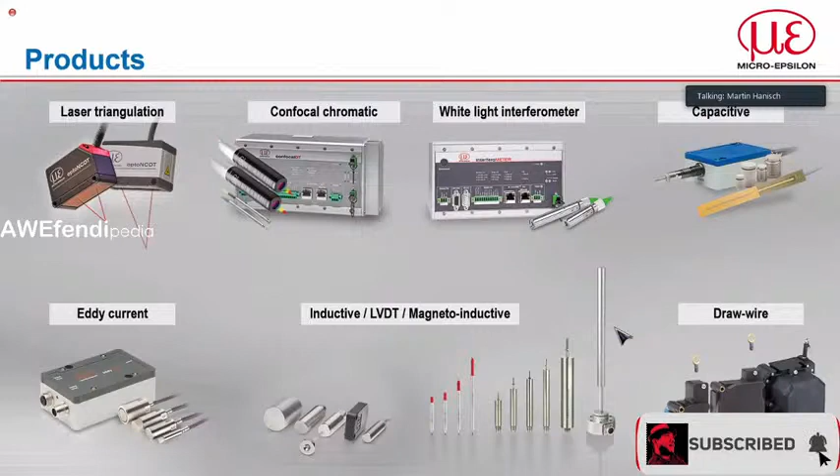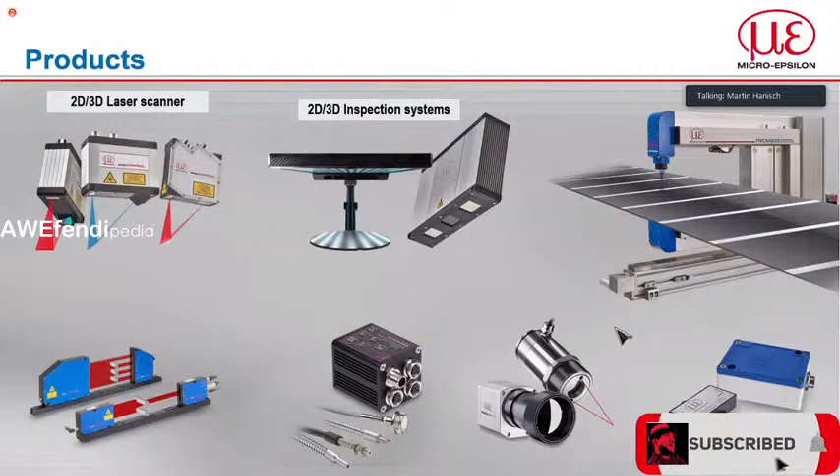Confocal chromatic sensor systems, white light interferometers, capacitive sensors, eddy current sensors, inductive LVDT, magnetoinductive sensors, draw wire sensors, and also the area we will talk about today: 2D, 3D laser profile sensors, 2D, 3D inspection systems, measuring systems, optical micrometers, color sensors, temperature sensors. Today we will only talk about this area, the 2D, 3D laser profile sensors.

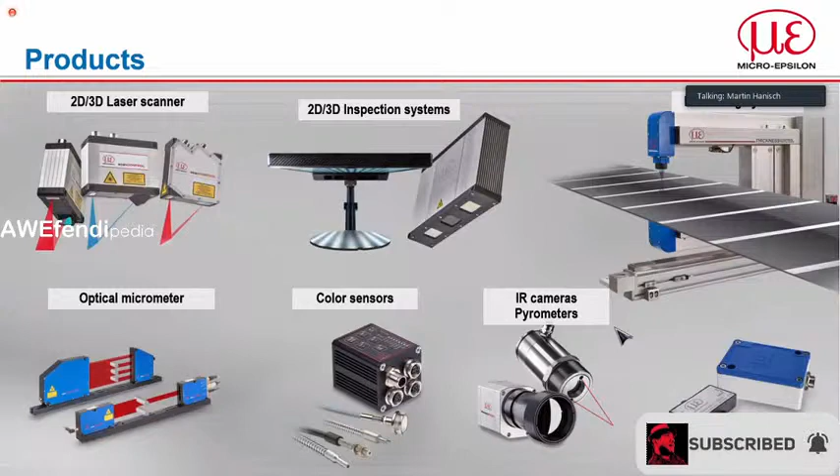In general, due to the variety of the sensor technology we have in our portfolio, of course we also have quite a lot of different kinds of applications and quite a lot of different industries we are addressing, from automotive with the big German car manufacturers to aerospace, so Airbus, Boeing, Bombardier, automation, heavy industries, semiconductor industries, and the smartphone industry. So in general, a huge variety. We are not just specialized on one kind of industry sector, but on different kinds of sectors.

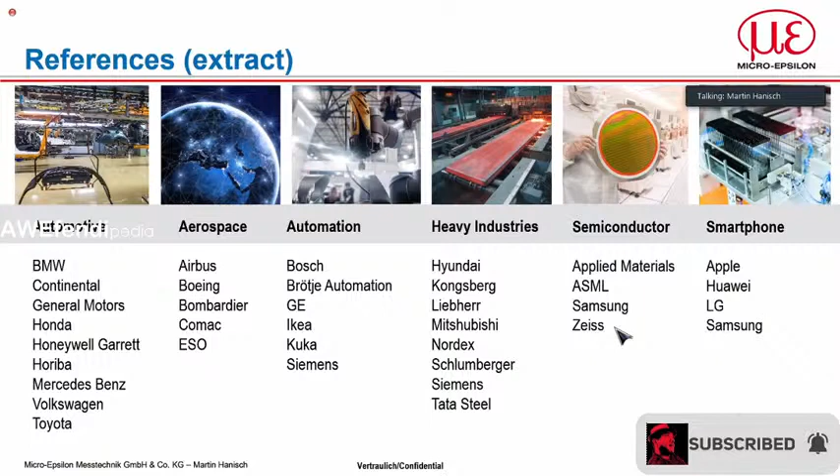And of course, we are also working pretty closely together with universities, research institutes, and so on. Of course, we are also ISO 9001 certified, so it is also mandatory for us to show all the documents, processes and products, also shown in our ERP system, so that it's easy to have an overview of the project.

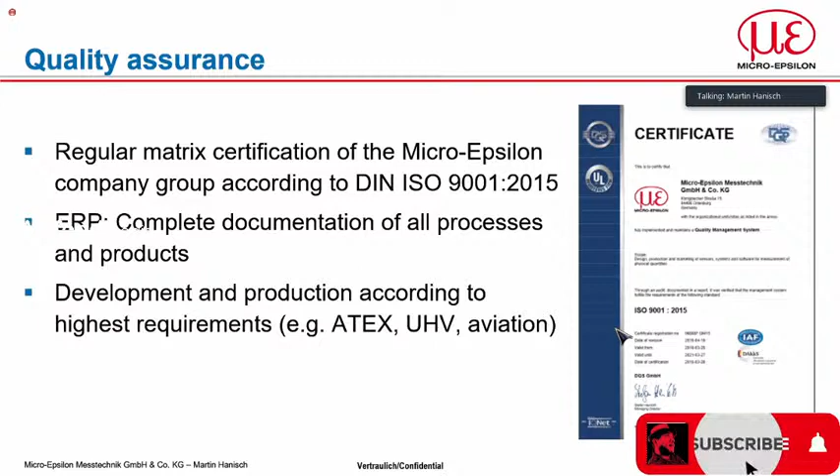Besides that, we can develop according to special requirements like ATEX, ultra-high vacuum, aviation, and so on. Overall, we are pretty engineer-driven, and a benefit in our case is that in most cases the sales guys are also engineers. First, I will start with some general applications that are solved with Micro-Epsilon sensors. Later on, we will focus on the laser profile scanners.

General applications are, for example, the position measurement for the world's largest mirror telescope, the E-ELT. In this case, the mirrors need to be adjusted with a resolution in the nanometer range, so that the mirrors are focusing on the detection area. And of course, the sensors need to be extremely temperature stable.

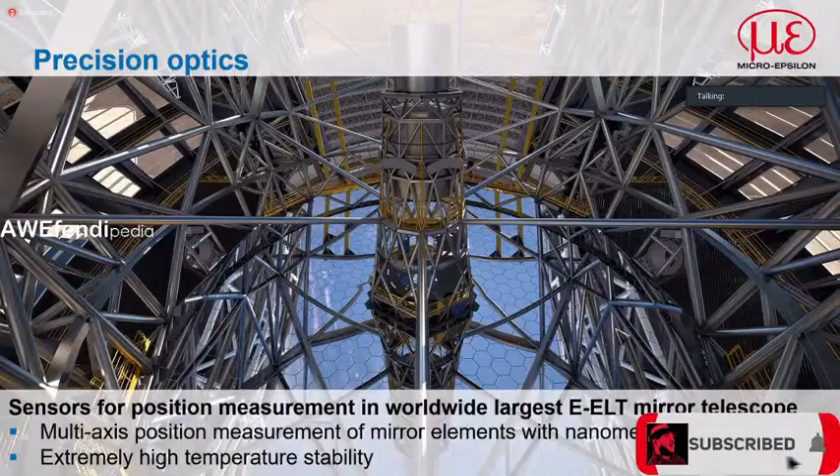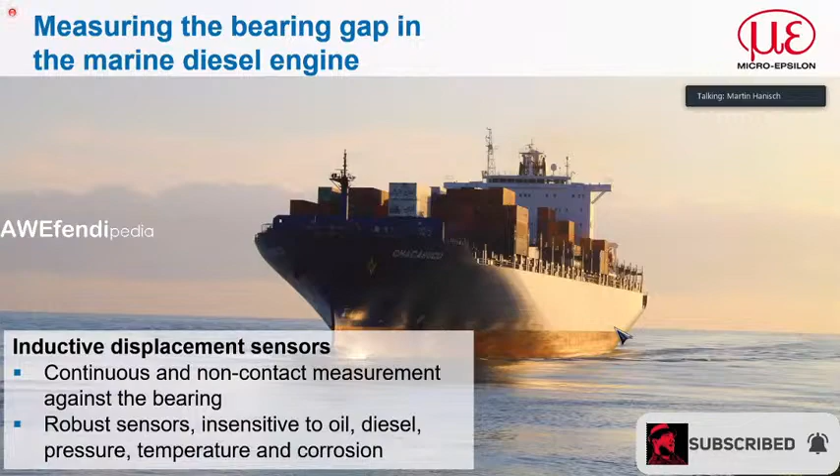Besides that, with the inductive sensors, measurements are continuous and non-contact, with very robust sensors that are resistant against oil, diesel, pressure, temperature, and corrosion, for example for the bearing gap in marine diesel engines on ships. Or condition monitoring for turbines and heavy electrical equipment with eddy current and capacitive sensors. These sensors can be built directly into the bearing to monitor the runout of the turbine. They are pretty resistant against magnetic fields and, depending on the technology, also against oil.

Another application that is, I think, fully equipped with our sensors in the meantime is the flap position and the door lock control for the Airbus A350. This is really a serial sensor, and due to that we also have the approval for aviation sensors with their special needs and special certification. This is also done by us.

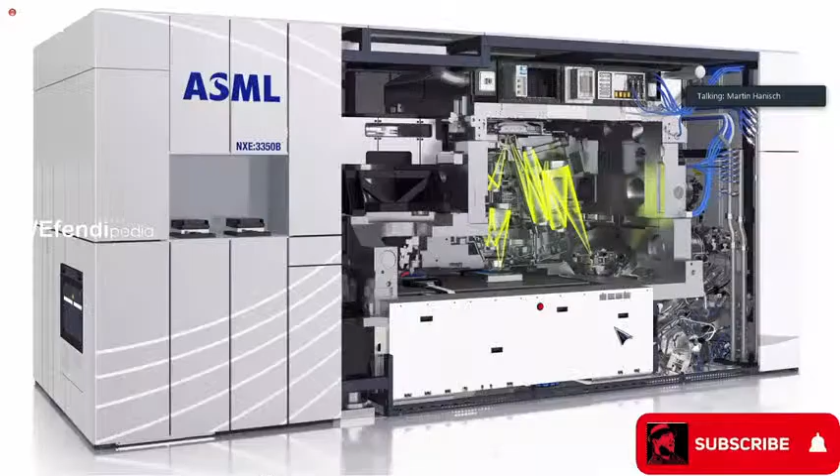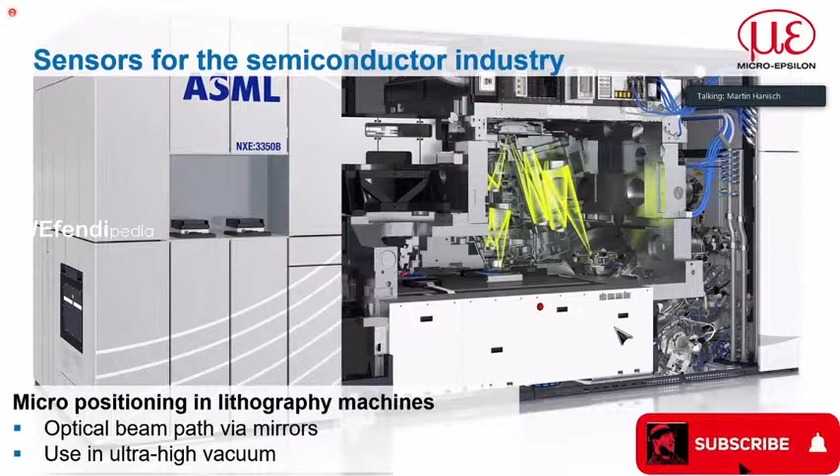One of our big markets is also the semiconductor industry. In this case, this is a machine from a machine builder from the Netherlands, ASML. There they need to position the mirrors and the wafers with the highest accuracy, and they are using our sensors because the optical path needs to be exactly aligned. The speciality in this case is that these sensors are working in ultra-high vacuum, which means really strong environmental conditions for every sensor, and not that easy.

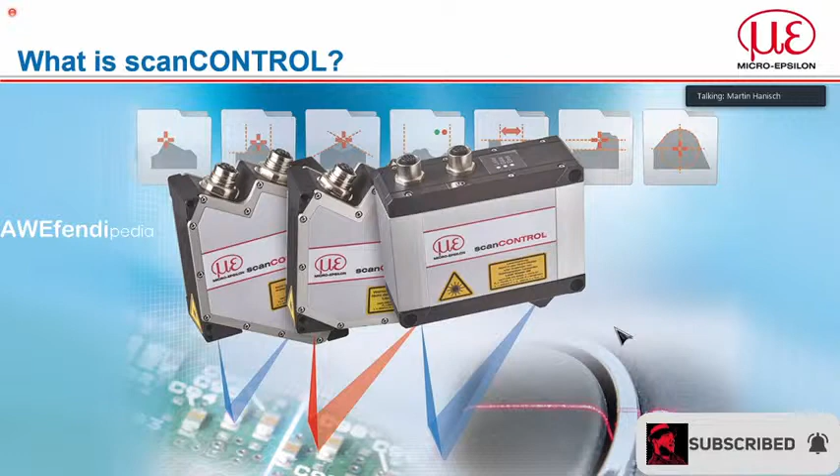That was mainly the general overview for the beginning, and now I will focus on the main topic for today. The main topic for today will be scanCONTROL. This is our name for so-called laser line triangulation sensors. Laser line triangulation is two-dimensional measurement, so you're not just measuring one distance, you're measuring several distances depending on the type of the sensor.

The sensors shown here have an X resolution of up to 2048 points along the X-axis, so you can measure about 2048 distances. They can be used from simple setups up to very complex systems, but I will show you the applications a little bit later.

A little bit of physics to the beginning. As I told you already, we are talking about laser line triangulation. A complex word, but in general not that hard to understand. In this case, you will have a laser diode. Laser diodes are only point light sources.

Then you will have optics, the laser optics, that will create a laser line out of the laser point. This laser line will be emitted towards the surface. On the surface, you will get a reflection. The diffuse part of the reflection will go through the optical path, through the receiver optics, through a mirror, then onto a detection matrix.

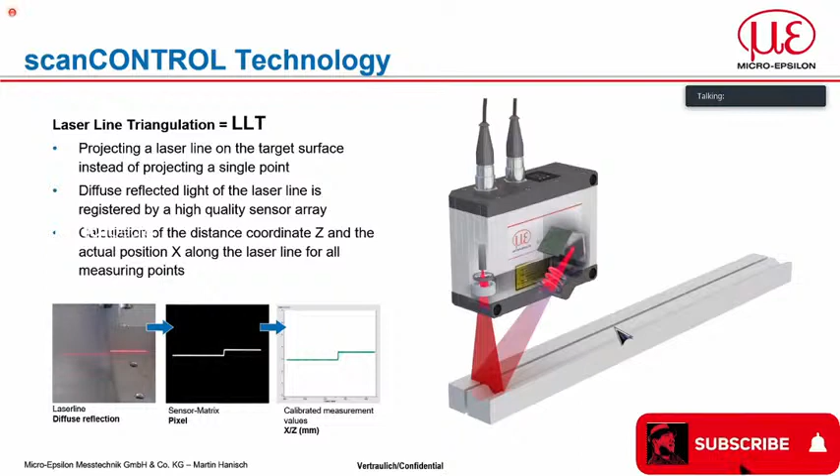Our philosophy in this case is that everything will be done on the sensor. That means no external controller will be required. Mainly we have two classifications: one is the compact classification, and the other one is the smart classification.

Compact is to implement into your own software environment. You can code the software on your own; you're absolutely free to do whatever you want. Smart sensors are mainly used in the industrial environment, in the machine itself. You're not really interested in the raw data, but just, for example, in step heights, and this can be done with the so-called smart sensors.

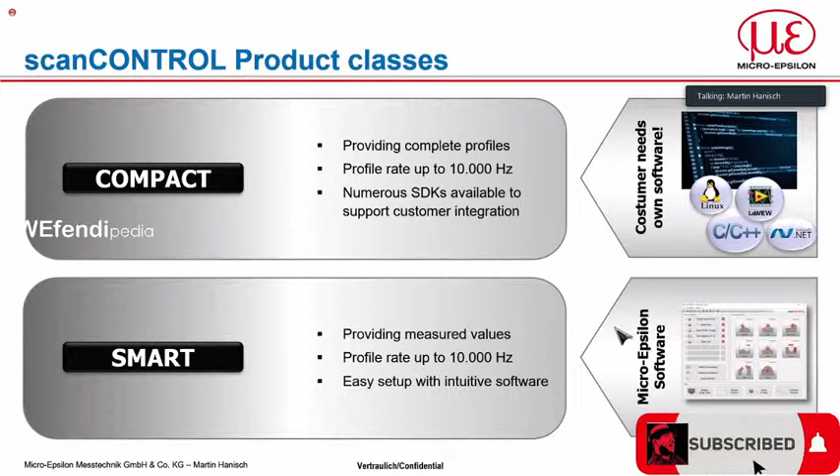For example, with a harsh environment it will always be good to have a bigger offset, just to get away from the target. Most of our sensors are available in red and in blue. This has to do with reflectivity properties, always depending on what kind of material you have. In some cases red might be better, in other cases blue, but this is something we can discuss directly on your topic.

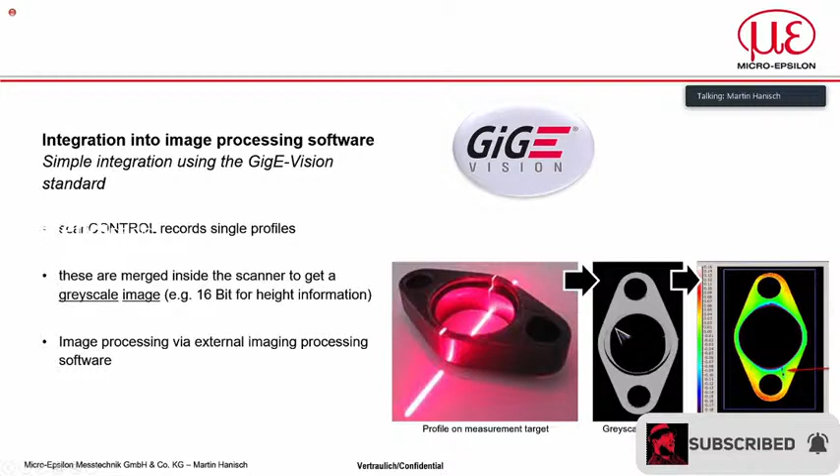Now we are coming from the theoretical background part more to applications. I will show the applications mainly in two different ways. The first part will be applications we have solved with our scanCONTROL Configuration Tools software. That means the evaluation itself was done in 2D. So every single profile will be evaluated and then, for example, transferred to a PLC.

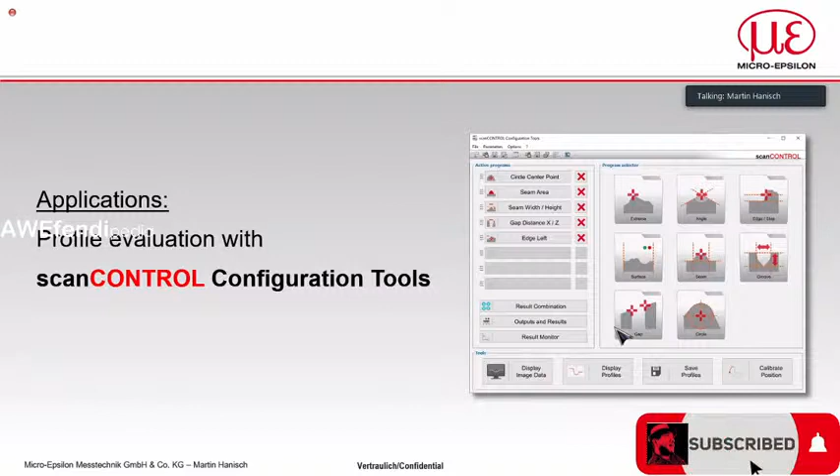And of course, you need to monitor, first of all, the height of this separator, because you need to get as many foils as possible in between the single cells to have a higher capacity. But if it's too small, you will get a short circuit, and due to that, you will get a problem.

This one was done with scanCONTROL 3000 series, 3010. I skipped a little bit the detailed options we have, because I think this might be too theoretical and also too early. Of course, we can always help there, and we can discuss your application later on.

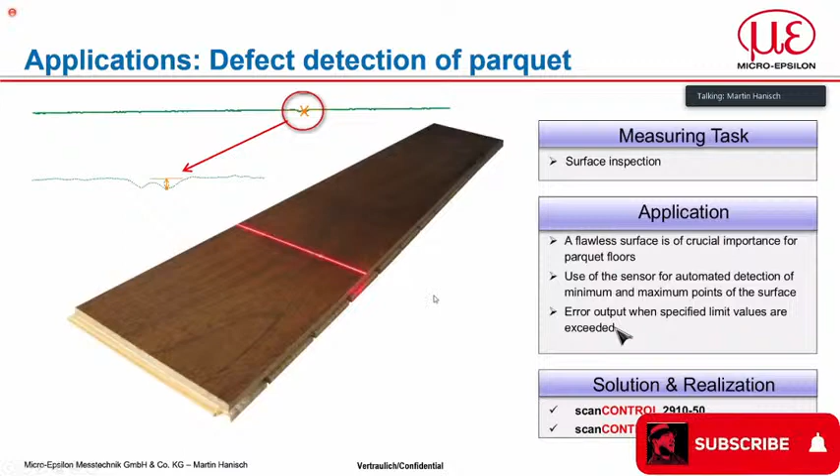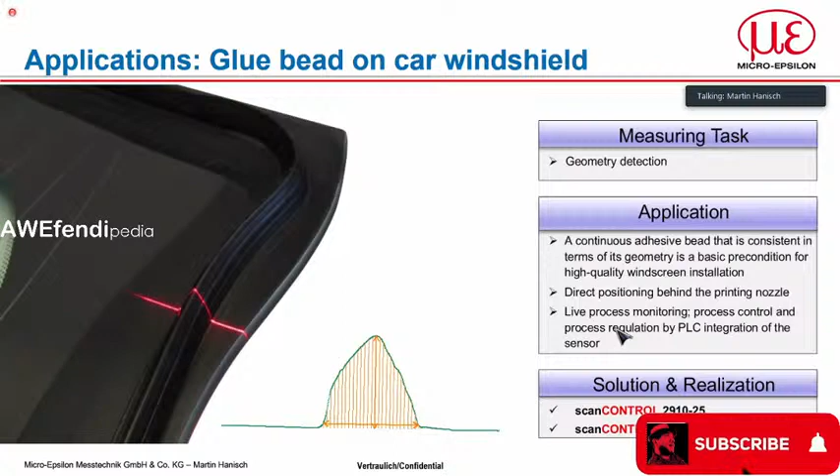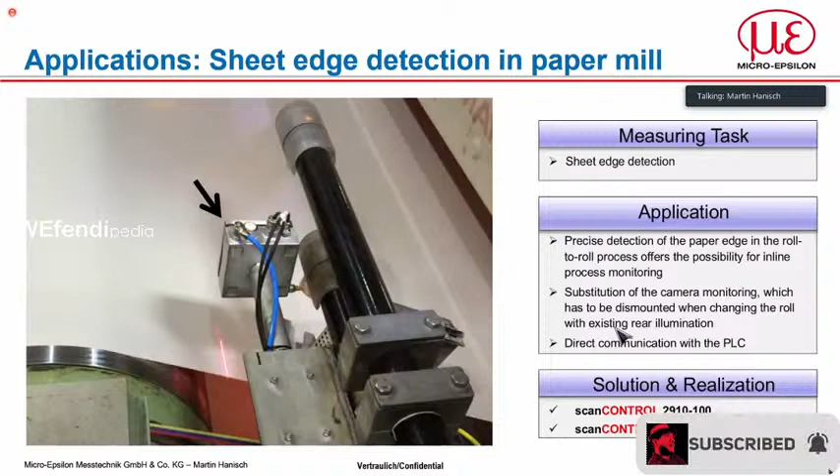So in this case, such a scanCONTROL can be used to check the movement left and right, and also to correct the direction very sensitively, to keep the paper always aligned in the middle, and used for inline monitoring.

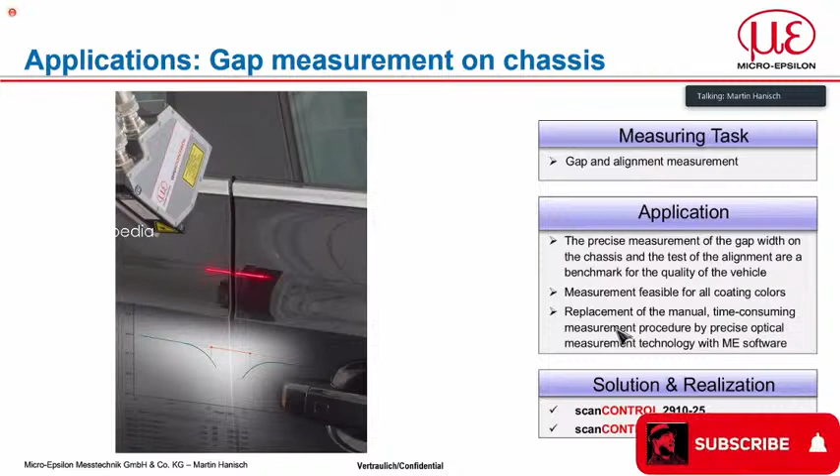Germany is known for cars, so of course there are many applications directly in the automotive industry. This is another example that can be done with our scanners: gap alignment of car bodies, in this case between the driver or first passenger door and the next passenger door, to keep it aligned. It can be used just for controlling it, or, slightly more complex, to use this data to control and align the production. This can go directly into factory automation.

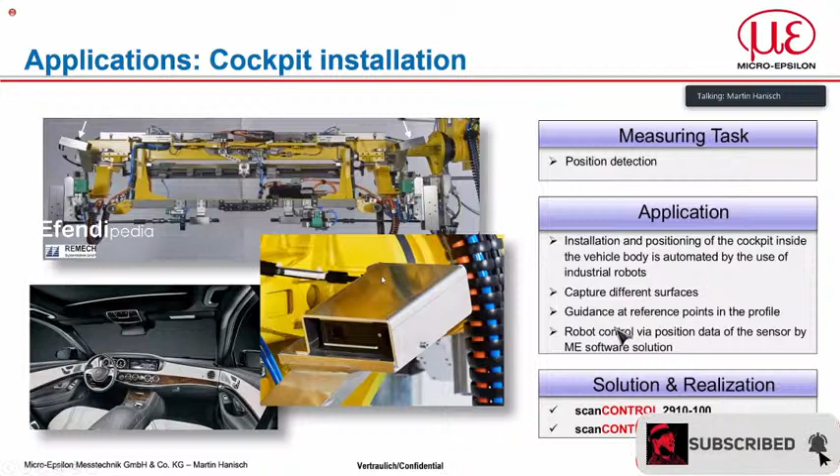From our software and evaluation on the sensor head, this one communicates directly with the PLC. Now, for more complex applications, research institutes often code their own software to have the possibility of checking everything in detail. As I told you before, for example C, C++, C#, LabVIEW, Microsoft .NET, LabVIEW, GigE, Python, Linux.

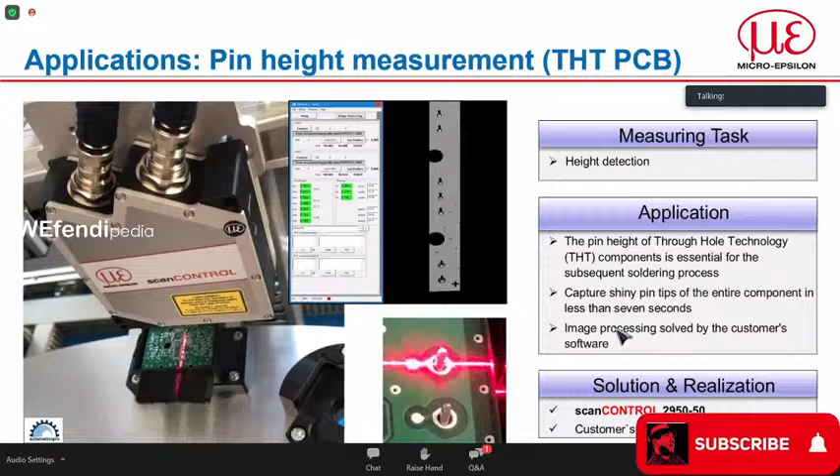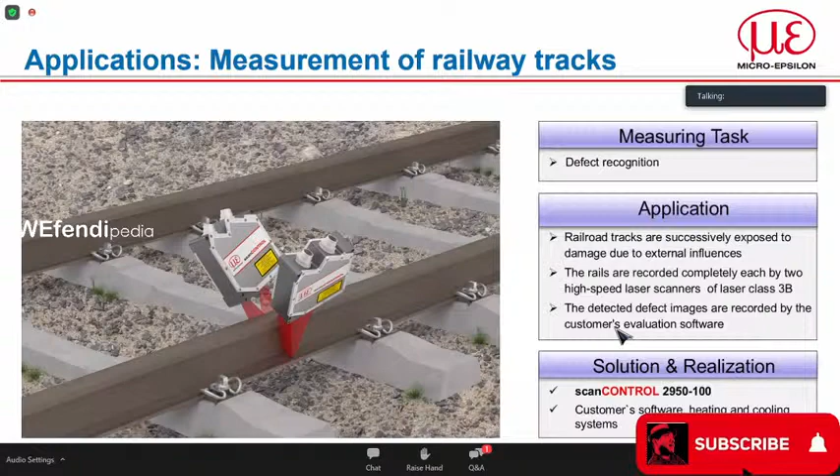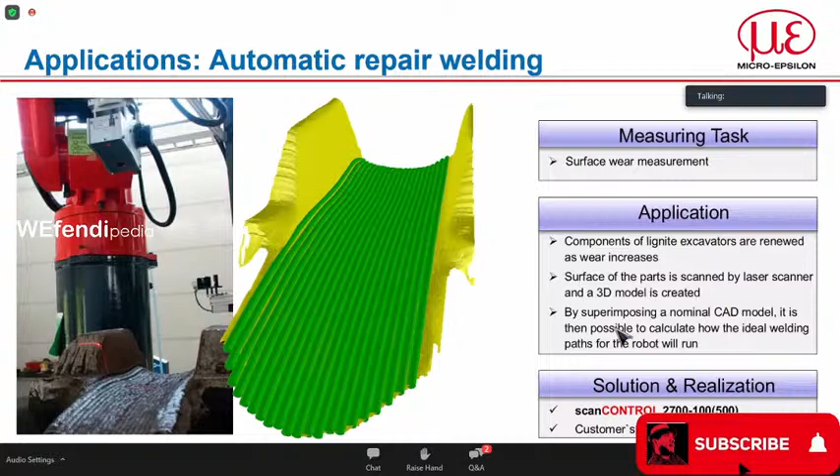Another similar but different application was done at a big German research institute called Fraunhofer Gesellschaft. This was a PhD study on automated workpiece processing - sounds a little strange what they're actually doing. Again you have a welding head, and directly in front of that you have a scanCONTROL, in this case a blue one, even though it looks slightly different.

Their aim was, for example, for parts that need an additional layer for protection, or pre-shaped materials where you need to add more material in some areas, and so on.

In this case, they use the scanCONTROL sensors to digitalize the surface. Then automatically the robot paths are created from that 3D image, and you can calculate your robot paths and start welding, creating protection areas, or adding stability with a single welding path.

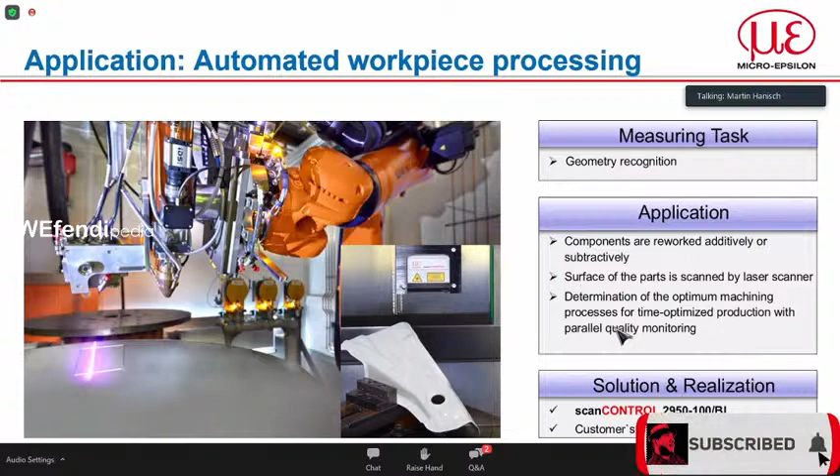This was done and it's pretty successful. The main benefit is that this uses a powder-based laser welding principle, and with powder-based welding it's always slightly tricky because you might miss some parts due to missing volume or something like that. This can be controlled and corrected directly in the process.

This looks pretty similar, but the application before was slightly more complex because this one is only in one direction. This is automated plasma cutting. In this case, they also digitalize the geometry and position of the object - in this case, for tanks, I think mainly for food tanks.

They digitalized the interesting area and used the position data. Due to the 3D data, the customer was able to move the plasma torch pretty accurately, so that on all sides there would be no problem, getting a proper and good cut.

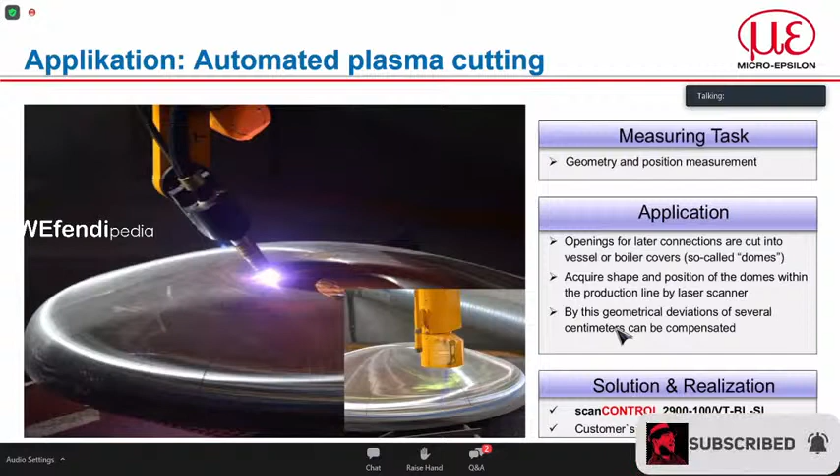www.micro-epsilon.com, 2D, 3D laser profile scanners and applications. Might be worth it, because there is much more shown there, also categorized into different applications. I will just hold on a second and show it to you.

2D, 3D measurements, laser profile scanners, applications. Here you can select also by material, by measurement task, or by industry area, and you will find much more applications.

For example, rubber profile, something like that. The other possibility is, if you're interested, the software tools I showed you.

That means the scanCONTROL SDK, the scanCONTROL configuration tools, scanCONTROL 3D view, and also some site support software. This is also available for free on our homepage.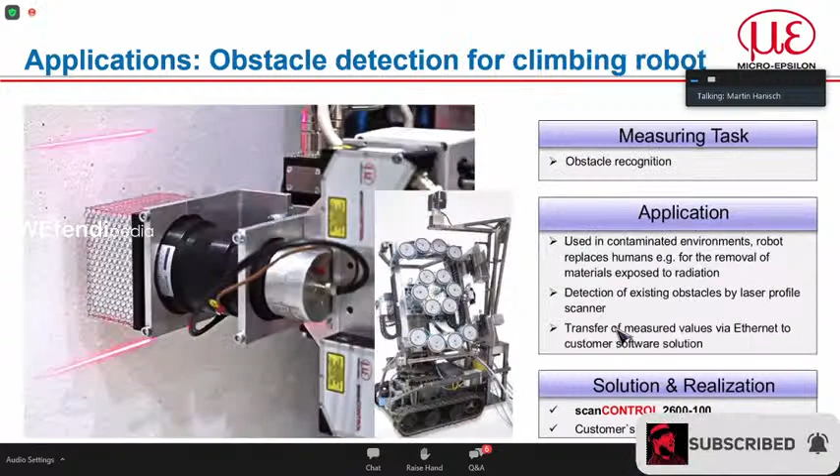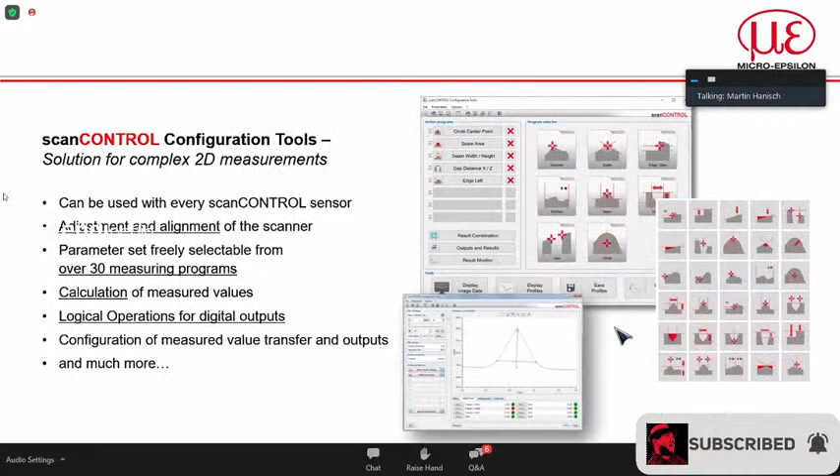Will be easier with the... Here we go. So this will be this sensor. In this case, you will have an X resolution of 1,280 points. So that means every point in X direction will have a point distance between these single points of 7.8 microns, and the reference resolution in Z direction will be defined as 1 micron.

Of course, for example, if you go to the bigger measuring ranges with 200 to 300 millimeters, even if they have the bigger matrix in this case with 2048 points, there the resolution will be lower. Of course, it would be always nice to have biggest measuring resolution, measuring area, and highest accuracy. Unfortunately, this is always impossible.

The third question in this case was about output format. In general, it's always depending what kind you will need, what kind of sensor you want to evaluate, how you want to evaluate it afterwards. In this case, for example, with the 3D software, you can directly get the point cloud out as STL, CSV, ASCII file, and then it's up to you. So there's a huge variety, and it's up to you how to go on in this case.

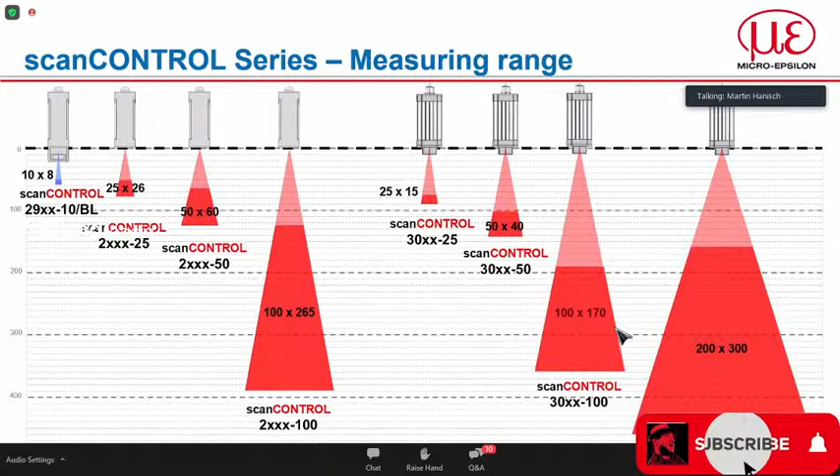If you find that the evaluation is not the way you wanted it in the beginning, you still have the raw data. So often in this case AVI files are stored, and then the further data handling will be done in CSV.

There was another question from Sigit regarding the software tool. Maybe we can also do a live demonstration of our software. Yes, we can. Hold on a second. Also, there are some hands raised. I'm not sure, is there any question?

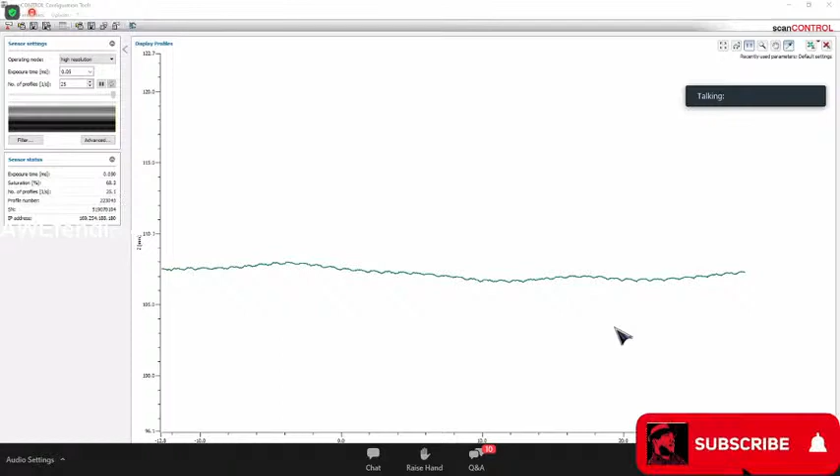Okay. For example, what do I have here at the moment? I will just set back everything. I have connected to my PC a scanCONTROL 3060-50. It's just a 50 millimeter measuring range.

Iqbal Mutaquin, sorry if I spell your name wrong. Of course, you can change the direction. It's always a question of what you're actually doing. In general, it will be possible. The direction is not fixed. Of course, you have to move either the sensor or the target, but the sensor itself doesn't care about that.

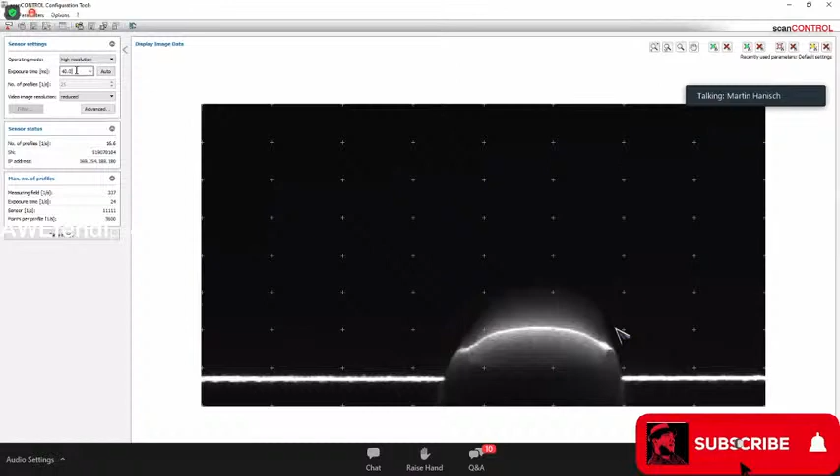What we are seeing here is the display image data. If I'm overexposing here, this one will be my finger. Of course, for an evaluation you will always want to have a straight line. A straight line is always nice. And now, for example, I'm putting in here just a ruler, and you can see that there is now the step here.

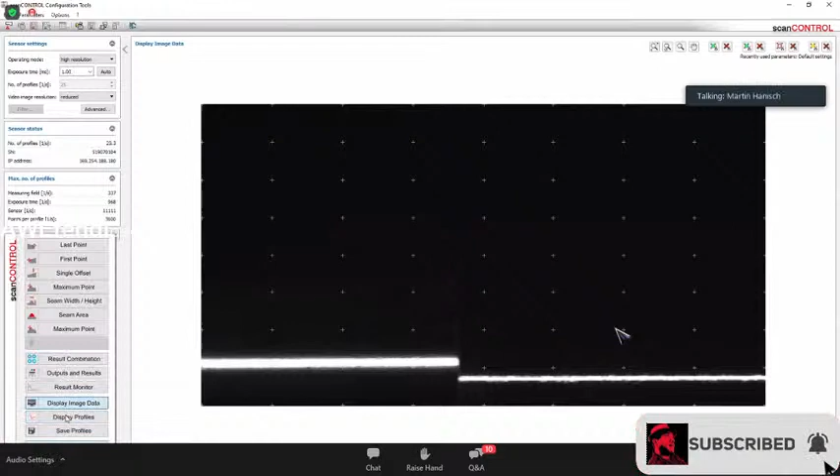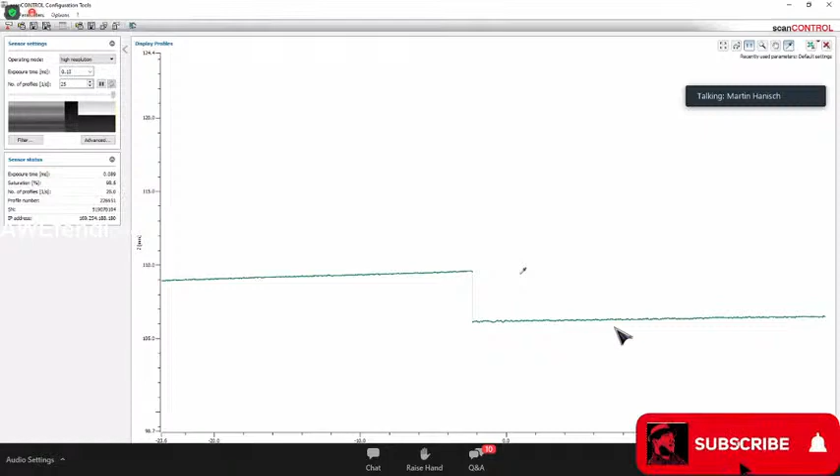Of course, this one is the raw data. Now, from the raw video image of the sensor itself, we can go to the profile. I have not really adjusted anything at the moment; we would need to adjust it in a proper way. Of course, there will always be small changes and small variations happening, and of course we always try to get a more stable result.

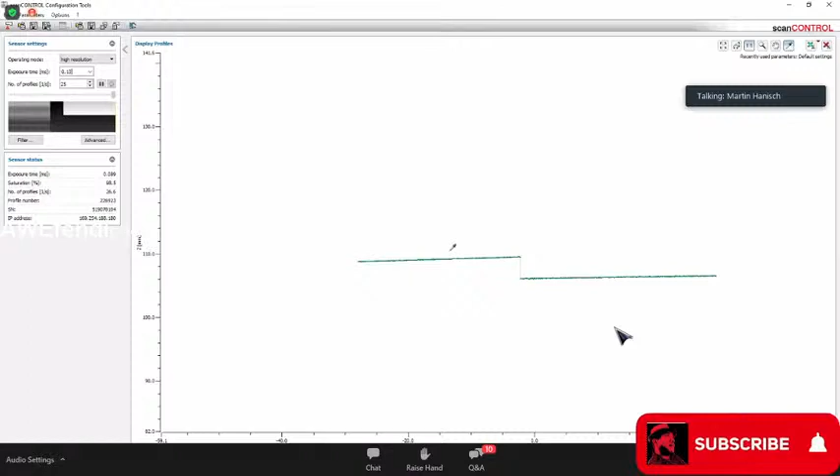So you can see here, for example, just a typical edge. And now I can go for it. I haven't deleted the primary parts. So I can now, for example, detect the edge step height, and also the angle between the ruler and the table. So we will use different angles.

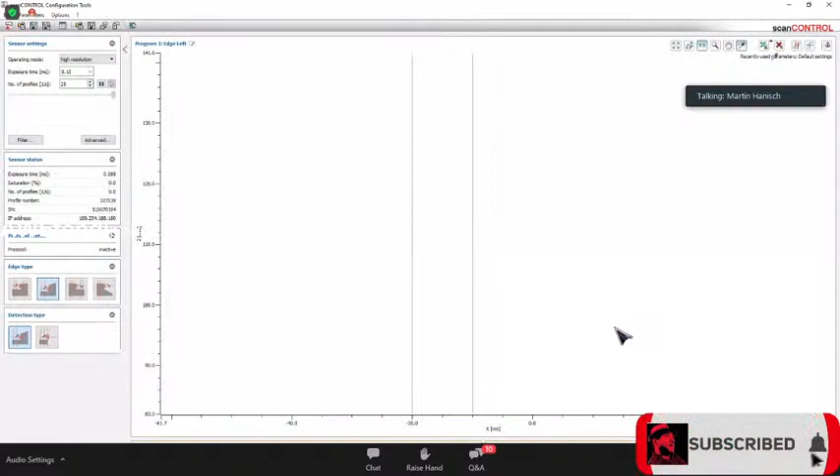So in this case, I will say, okay, I'm searching for an edge. Why have I used edge left? Left means the searching direction: I'm searching from the left side. Choose the algorithm: I'm searching for an edge down. All the points between the two vertical lines will be used to create an average line. This one will be here, this red line.

And in this case, you can see, you can set a threshold that will be parallel to that. And here we go. Here we found the edge. The edge will now have the coordinates 100 in x direction, minus 2.34, and in z direction, 107. And if I'm moving that also, of course, it will be changing a little bit.

Yeah. To be honest, here is a groove in the ruler. This is really the way it is. So, this will be one possibility.

And then, for example, also we can measure the height about that. So again, set a reference line. And here we say, okay, now we are having a height difference of 3.6 millimeters. What you can see is, for example, that they are not aligned totally parallel. So that means, besides the offset, there will be also a difference angle between these two lines on my table and the ruler.

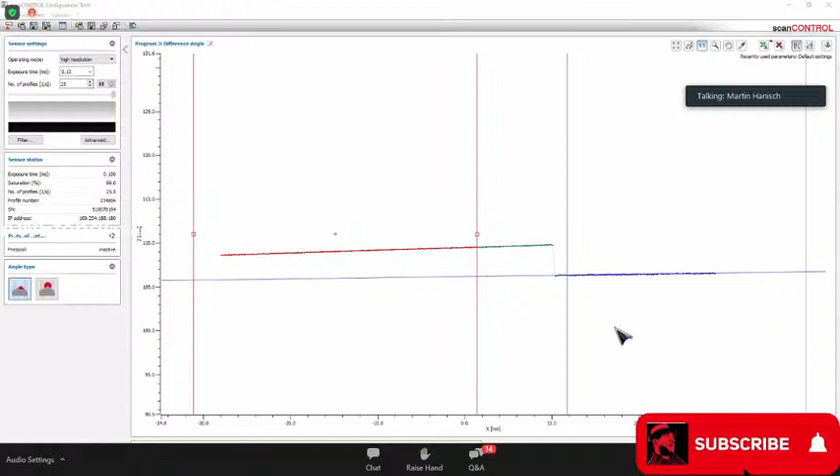Besides that, I can't show it to you now online, because I don't have a moving axis with me at the moment, so I only can show it to you offline, especially because there was a question regarding 3D applications.

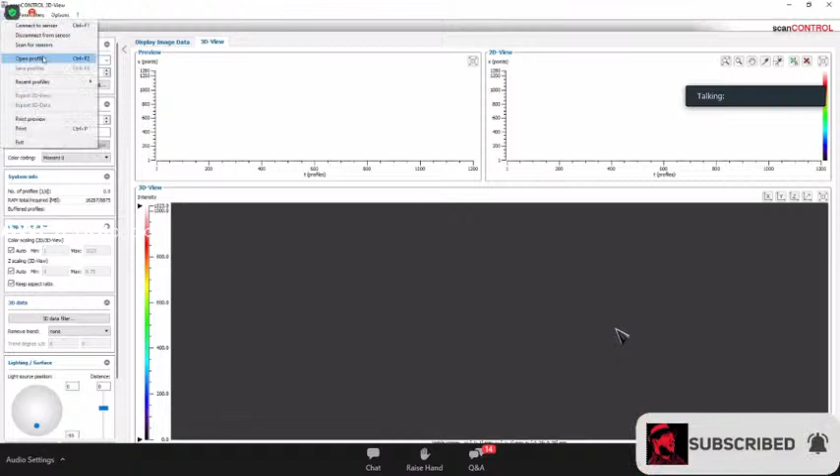Please be careful. Again, the question from SKF: atomic force microscope, confocal laser scanning microscope. Both of them are totally different technologies. They are not really comparable with the laser line triangulation principle. Of course, in this case, you can get a much higher accuracy with the atomic force microscope as well as the confocal laser scanning microscope. Be careful, because confocal is again a different technology.

Confocal chromatic is normally based on the chromatic aberration of white light on lens groups. Again, different technology. We are working here more or less on the rougher technology of the triangulation principle. The benefit will be that it is faster and has bigger ranges than microscope testing, and in automation it will often be faster, but with less accuracy than microscope technologies, unfortunately.

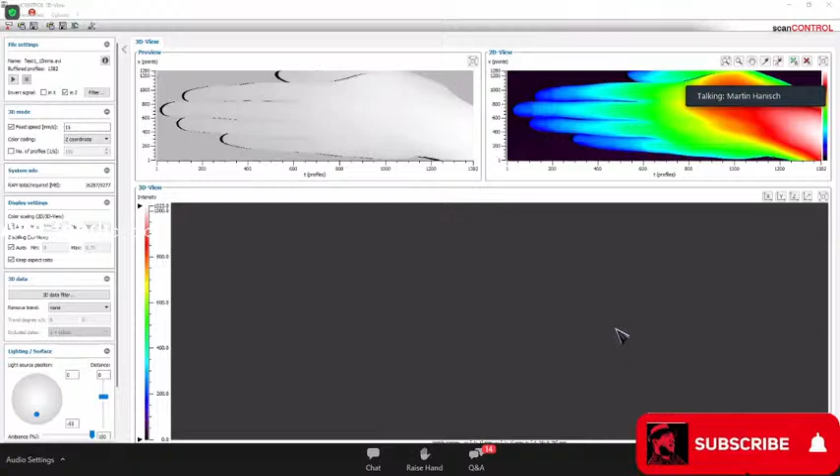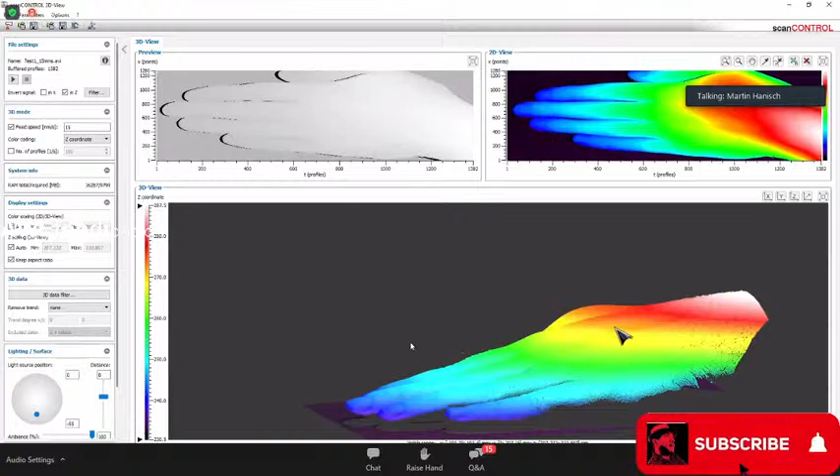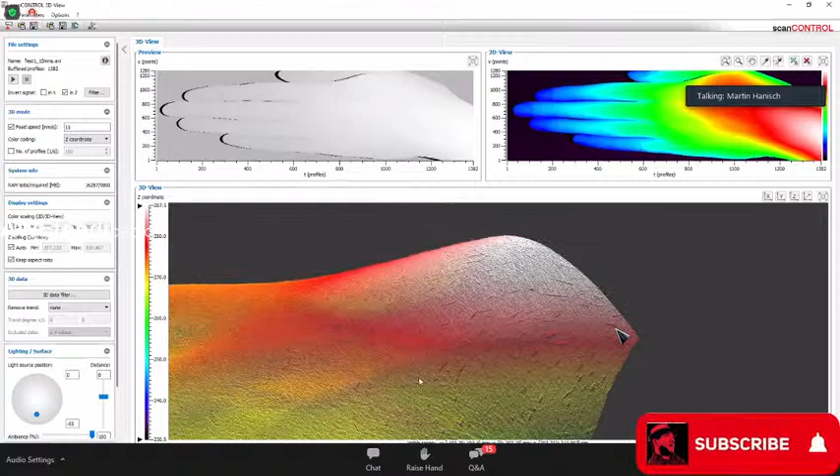Like I showed you in the picture, for example, this one was a scan of my hand. The scanner I used in this case was a really rough scanner, about 100 millimeters, but still, also for this scanner, you can see, for example, the hair on my hand. So this is a dash 100 millimeter scanner, a rougher scanner, and still you can see pretty accurately how my hand looks.

By the way, there is really a reason why I am not scanning the other side, especially with the smaller measuring ranges. It will always be that the smaller the measuring range, the higher the accuracy. Yeah.

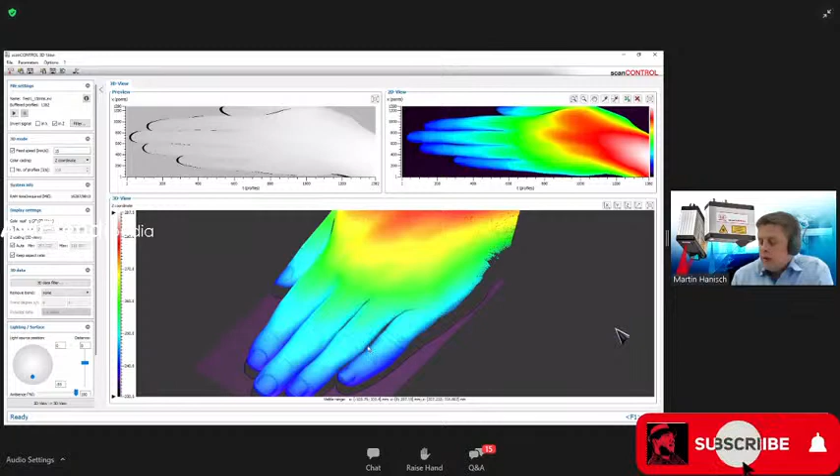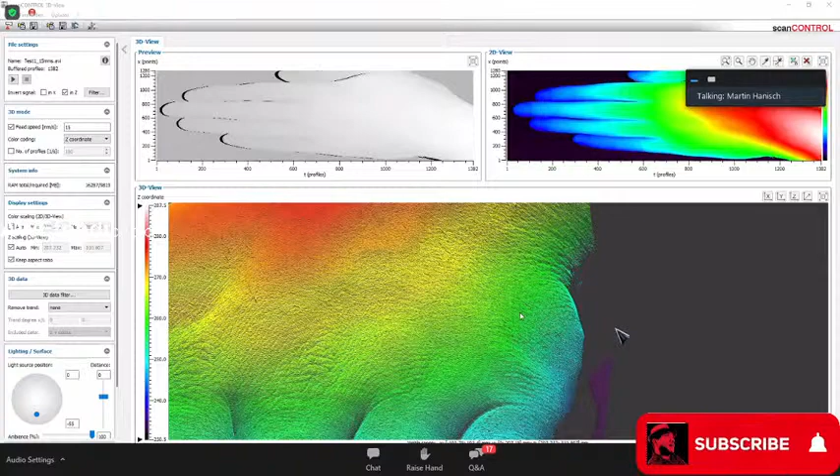So in this case, if I would have scanned it on the other side, you would have been able directly to detect, for example, my fingerprints, and so that's why I just scanned the backside. And here you can still see more or less also some scratches on my hand.

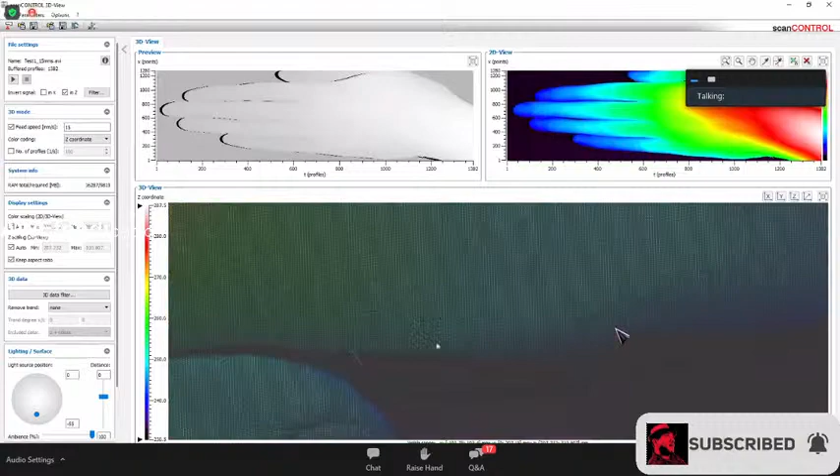Let's just check there. I think it was the left hand. There should have been. Yes, it was the left hand. I think so. At the moment, but I don't see my scars. Yeah, hard to say. Maybe you just need to change the color coding, of course. And due to the change of the color coding, you can also make some other things visible or not visible.

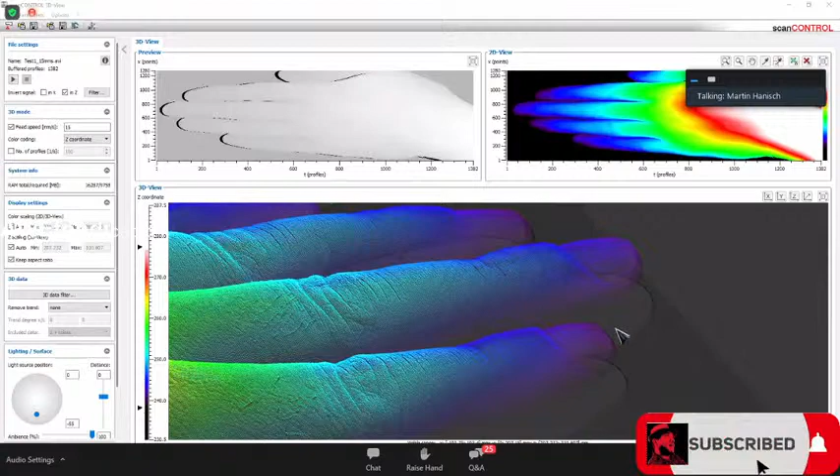So ultrasonic is also used for baby surveillance during pregnancy. This can be used to look inside the body. The laser profile scanner can show you, for example, a really good exact shape of the belly, but not inside. So please don't mix it up. Totally different topics.

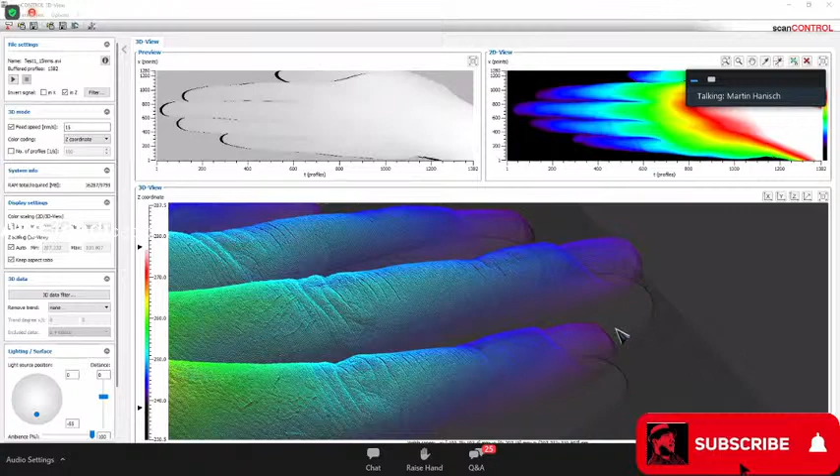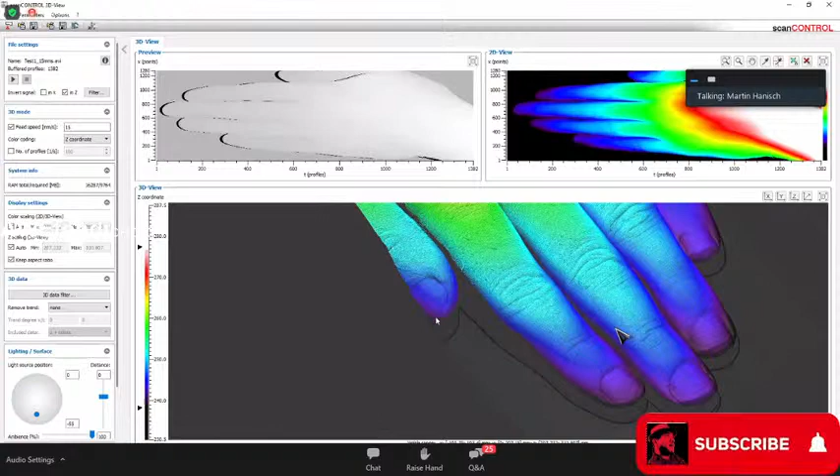Then here's the question from Sigrid Nukroho. Well, here the scan of my hand. It was a general inquiry about how such scanners will behave towards organic material, human material. There are some inquiries in the food industries to scan meats or different kinds of meats and so on. That's also why I've used my hand in this case. This was just to show how a scan of a human body part might look. So not a specific application in this case.

Nothing in detail. I think the background was a medical application, but I'm not so sure anymore, and if so, I probably would not be allowed to talk about that.

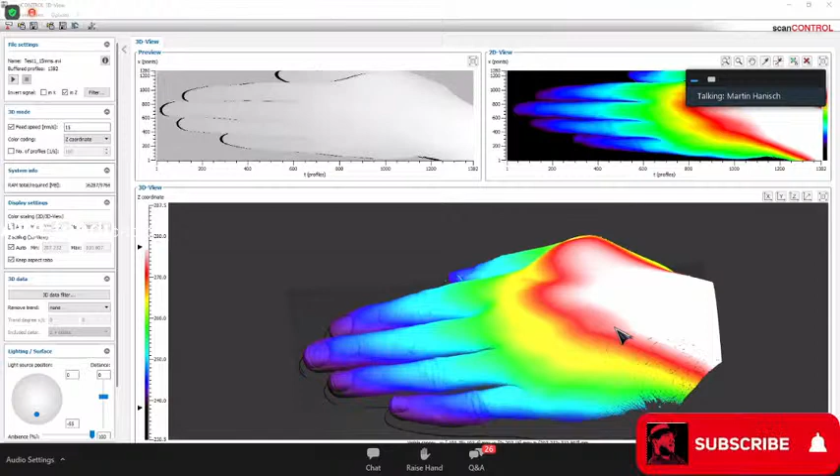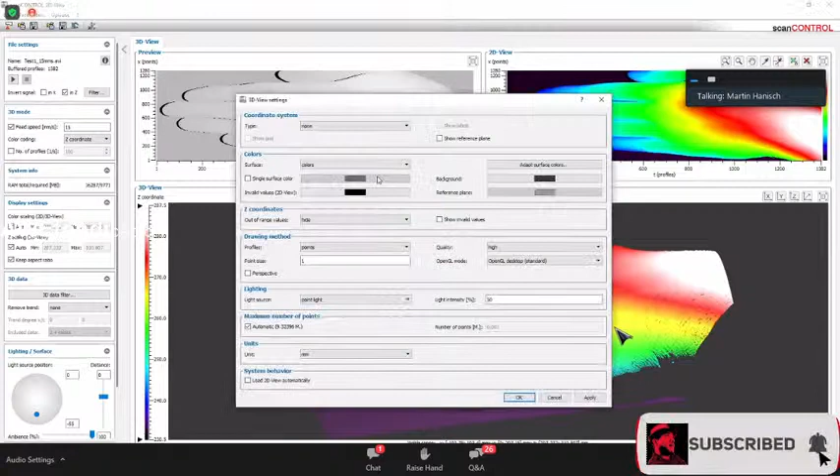Then Arjun Pratama was asking about the relation between RGB color and height in millimeters. Yes, there is. Of course, I can adjust it. You can see here on the left side the scale of the Z coordinates. And of course I can lower the RGB and increase the area of RGB, or I can also change it from color coding, for example, to grayscale and so on. So this is just a different way of displaying the height information. This is just a color coding. So nothing special, it's just easier to see with colors.

Hendra Hadi Praya, sorry if I said it wrong again. The direct export, no. He's asking about creating a 3D data model for CATIA software from an actual part. The direct implementation from scanCONTROL is not possible. So in this case, you need to do several steps. It is possible to implement it later on, step by step. Direct implementation into CATIA will be not possible; it doesn't make any sense in this case.

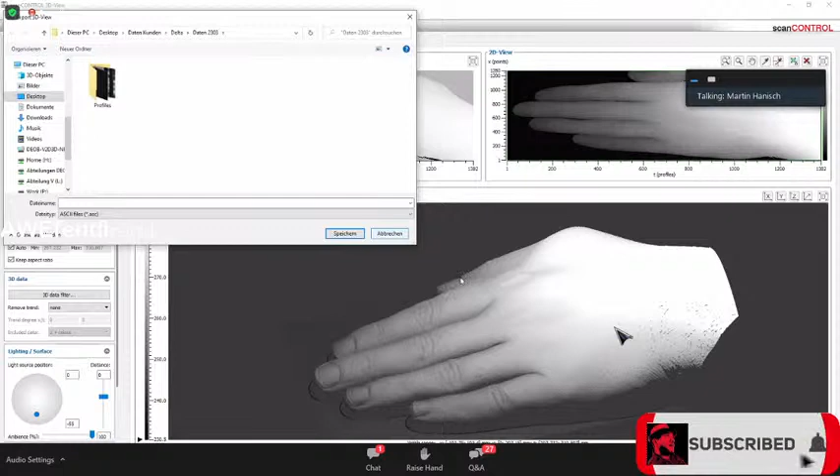Options: I can export 3D data in this case, and I can export it as ASCII file, STEP file, binary STEP file, ASCII, CSV, PLY binary, or PLY ASCII. So in general, it will be possible, but the direct implementation in CATIA is not possible because you will need the step in between. For example, going through the software, record the data, and then do an export afterward.

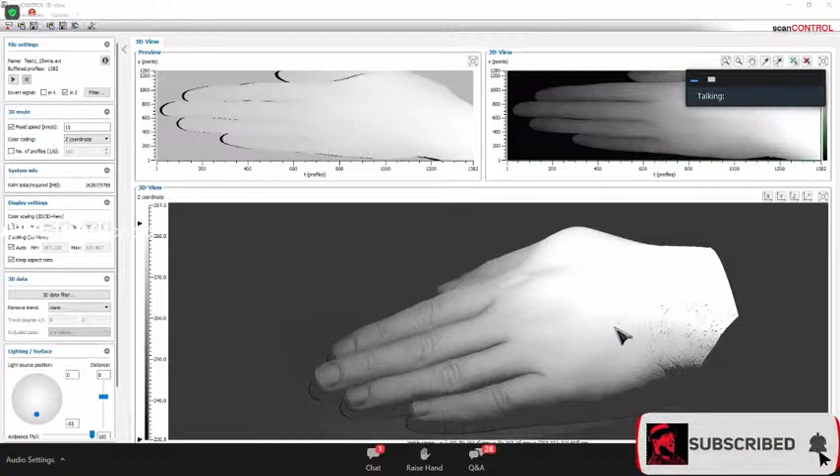SKF is asking about the logarithmic amplifier for small reflection in context of laser scanning. To be honest, I'm not so sure what you mean with that. Maybe you can ask it in a slightly different way. At the moment, I'm really not sure in which direction you might mean this question.

Here is still the question open from Iqbal Mutaqin about the use of the scanCONTROL in only one direction. No, of course you can also move the sensor in different directions or the target in different directions. In general, it will be no problem in this case. So it is always just a question how to go and what to scan for that.

And I think there are two further questions not written in English language. Maybe, Fikri, can you help us to translate these two questions, please? Sure. Okay, I was hoping for the question of Armado B, Axis Mundi, about NDT testing or virtual testing. I just used Google Translator. About the difference between NDT testing and profile testing and so on.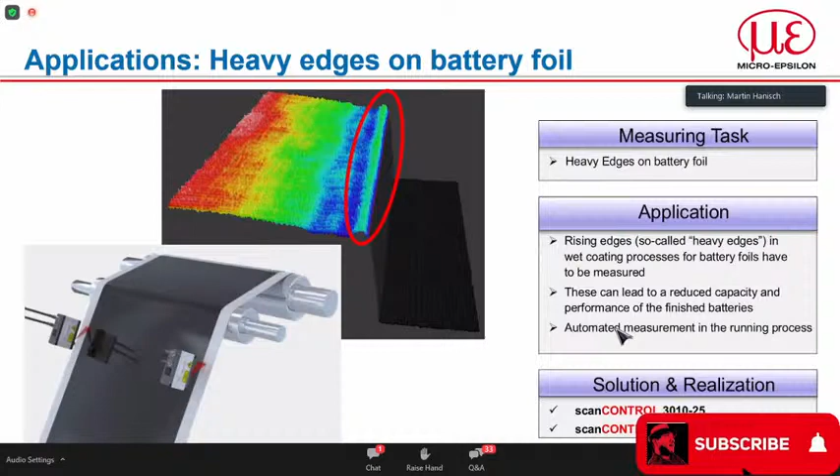Yes, many participants are asking for getting your presentation. Is it possible to share the PowerPoint? I need to check internally, because there might be some critical parts. I will check and maybe we'll cut out some parts, and then I will share it with you. In general, I think it will be possible, but I will check.

Have you answered the question from Mr. Ahmad Faizin from Polytechnic Malang? What is the distance, how does the scanner detect the first data to the next? Can we set the scanner to detect data within a certain period of time? Hold on a second. Still on the open question. Okay. In my case, not, I don't see any open question. Yeah, there are still three open questions. Sorry. Okay.

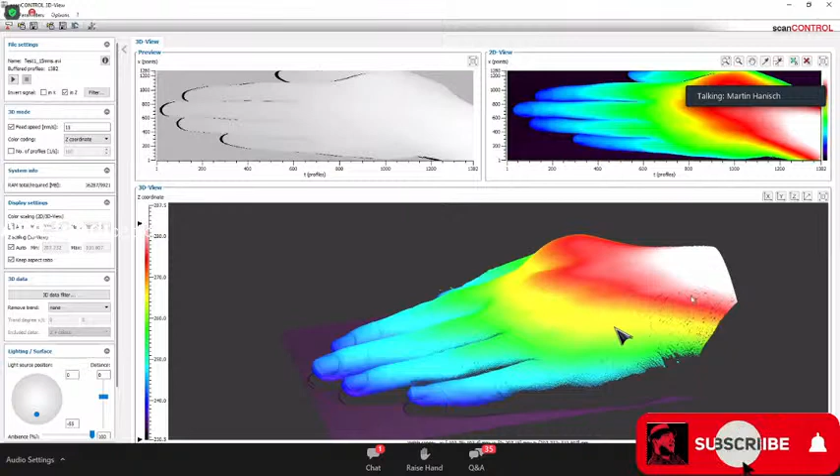As brighter, except for yellow, it will be just a reference towards the height information, but it's just a color coding. So in this case it's always a question. Of course you can also use different kinds of codings and so on. For example, in this case, as brighter it will be, as higher it will be, but it's just, let's say, an illustration question. So yes, there is a dependence, but always in different ways, so hard to say.

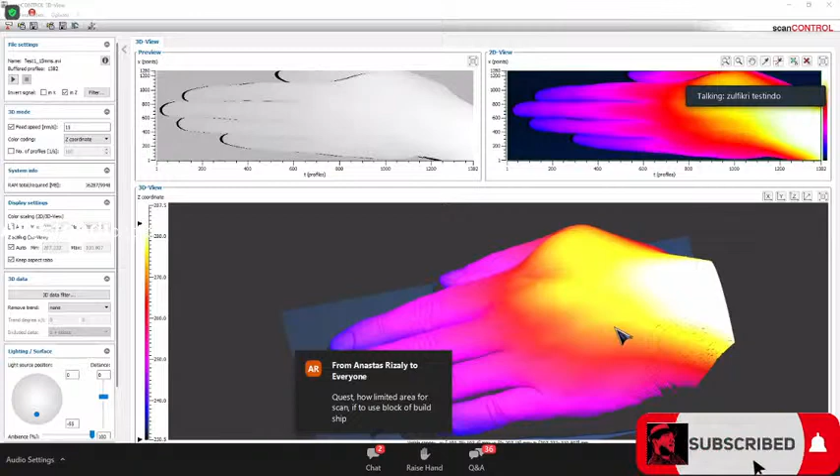Maybe another last question: could the laser sensor be used on any kind of material surface? What are the surface material limitations for both blue and red sensors? Mainly due to the fact that we are working with reflections, real transparent glass for example will be a problem. But this is from my experience, it will look different if, for example, the glass is coated. If there is a coating on the glass, the reflection properties will change quite a lot, so it will be possible.

In general, you can say for organic, semi-transparent, transparent materials, blue laser line will be always better, because blue from the physics has a smaller wavelength, so it will be reflected earlier than red ones. Due to that, for semi-transparent, transparent, or organic material, I would recommend blue. For other material, like normally metal or something like that in this area, red will be also fine.

Is it possible? Another question: how is the limitation area for scan if a customer would like to use a laser scanner to scan a block of a ship building? I think if I get you right, one block of a ship will be really huge, meaning we are talking about meters.

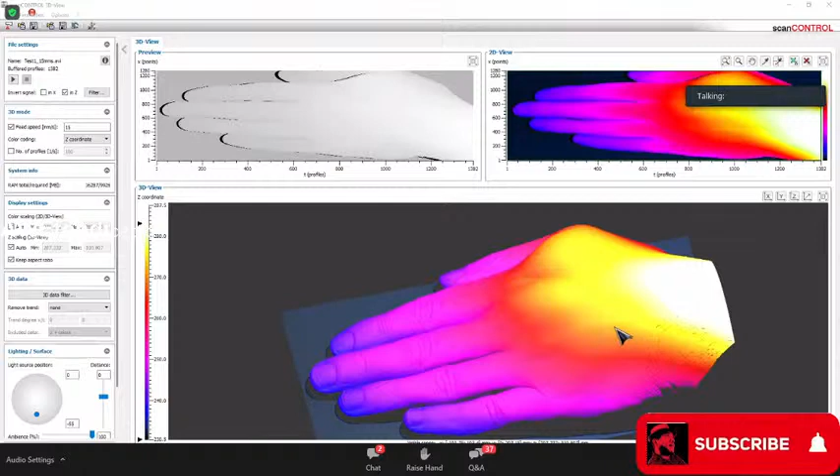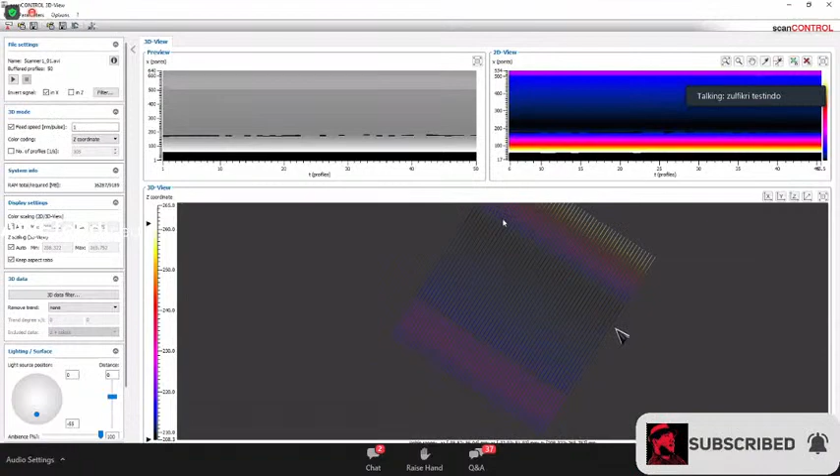Okay, if there's nothing else, Martin, Boyang, all of my friends from Testindo, Micro-Epsilon, we have already answered all questions, and we hope all are satisfied with our answer and information. We will wait from all of you in the audience - if you need more detailed discussion, please contact me by email, WhatsApp, or phone call. We can arrange a more detailed discussion another time.